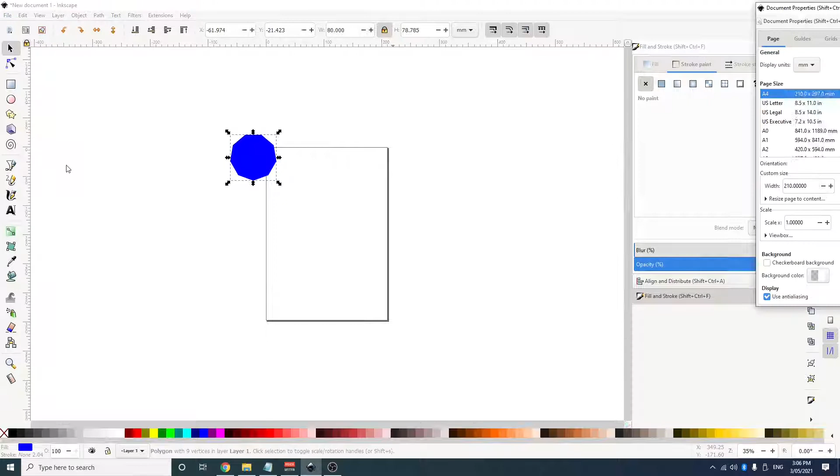So, to make a coaster, one must design a coaster. This step is called CAD. I'm going to do this using Inkscape. I'm going to be a little fancy pants and make my coaster a nonagon shape. The outer black line here is called the stroke. I like to get rid of this for outer cut and pocket operations, and just work with the fill. That's the blue section in this case. I lock the aspect ratio and make my coaster 80mm wide. I adjust the size of the page to include just the workpiece, and voila, my coaster is designed.

But not so fast. If I was to cut this, all would go well until near the end of my cut. The coaster would break free from the source material, fly across the workshop, and probably get chewed up by the spindle in the process. So in other words, I need to hold it in place somehow. To do this, we use tabs. Tabs are a section of the material that remains uncut and holds the workpiece in place. You need to include these in your Inkscape design. For a shape such as this, I would use 3 tabs minimum. And with that, we complete the CAD.

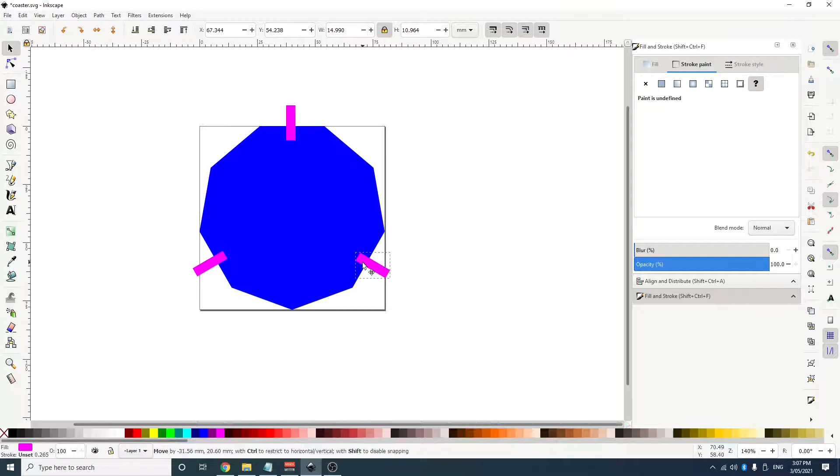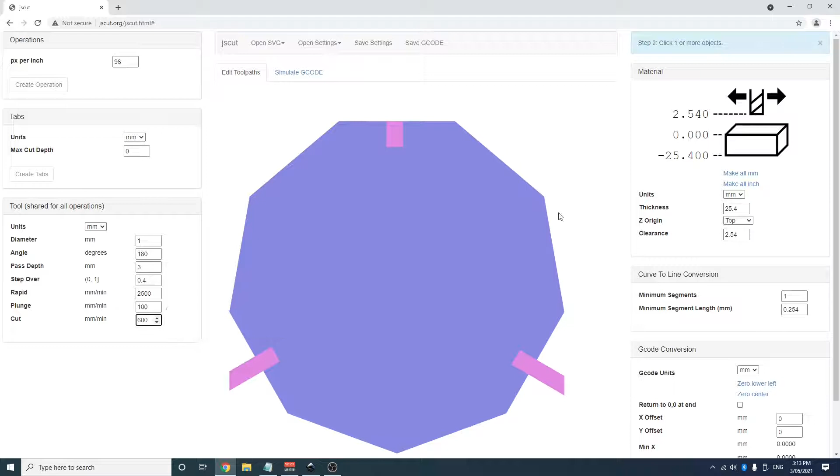The next step is the CAM. We can do this using JS Cut. It's an online app that works directly in your browser. I import my coaster SVG file, configure the diameter of the cutting bit, the maximum depth my machine will cut in one pass, the speed the machine moves whilst not cutting, the speed the machine plunges into the material, and the speed the machine moves whilst cutting. I can also set the clearance height the spindle will go to whilst not cutting. This can be handy to avoid hitting clamps and so on.

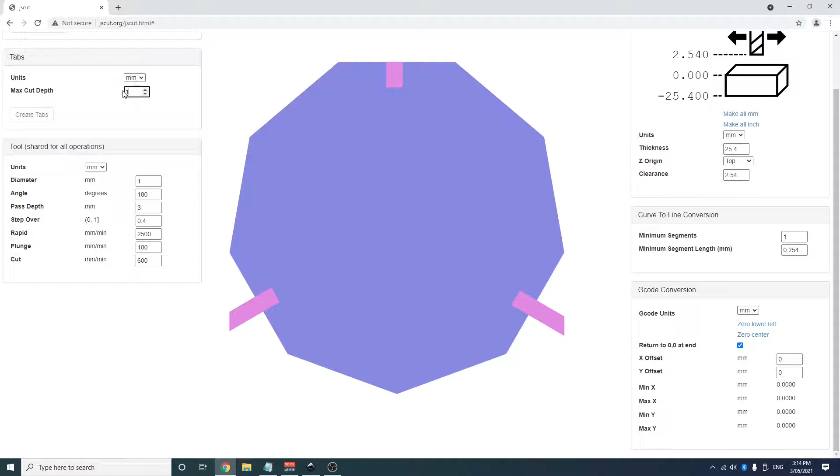By default, the origin is the top left of the drawing. That can be changed too, and I'm going to make it the centre for this job. Now let's set up the tabs. First, specify a maximum cut depth. Usually you'll make this 1 or 2mm shy of cutting all the way through the source material. My source material is 3mm thick, so I'll use 1mm. Then select the tabs and create.

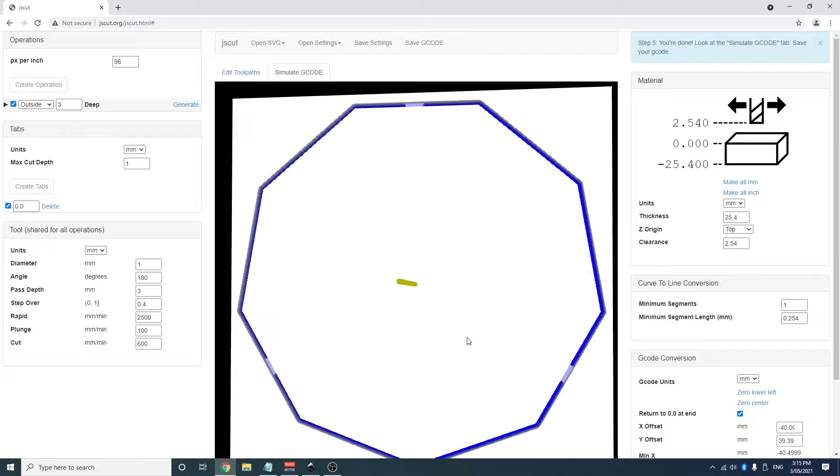Now I select my coaster. I want to cut the outside perimeter of my design, so I select the outside operation. I set my desired cut depth and generate. Now I can simulate the G-code. You can see here how it leaves the tabs. It also shows the expected runtime of the job. I'm going to save this G-code and meet you over at the CNC.

Oops, how'd this get here?

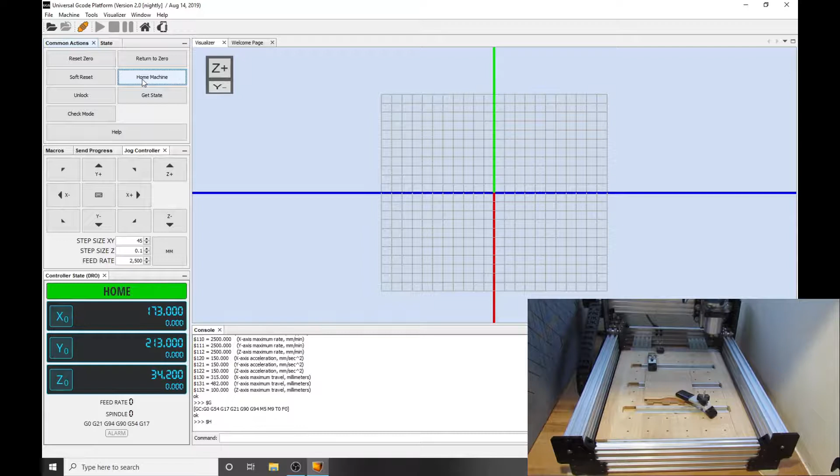Put down a piece of flat scrap under your workpiece. Clamp down your workpiece and open up Universal G-code Sender. This is the software that drives your machine. I connect to the machine, home it, and load the G-code. You can see this wire diagram shows the instructions to cut my coaster. First you set the origin of the machine, in this case the centre of my coaster. For the Z-axis you can use a sheet of paper to adjust the height to within a hair of the workpiece. Now all that's left to do is run the job.

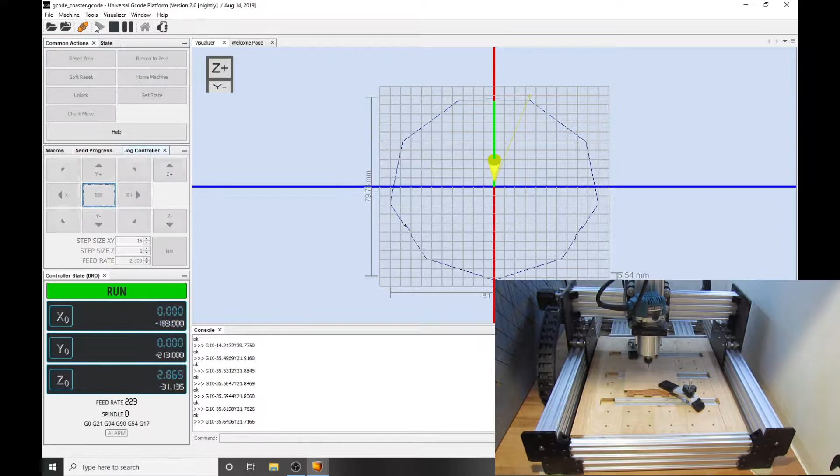Here's the result. I can just cut the tabs, give it a light sand, a quick oil, and well, I don't want to brag, but I've saved myself at least $1 by not having to buy a brand new coaster. There you have it, a very simple CNC project.